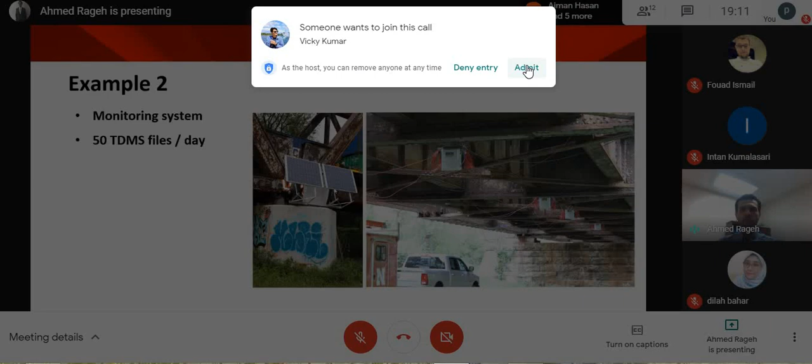And for each train passage, what's going to happen? This computer will start recording the data when the train crosses the bridge. When the train leaves the bridge, it will not record the data. So we call it event recording: collecting the data when we have a train, not collecting the data when we don't have a train. So let's go back to our coding thing.

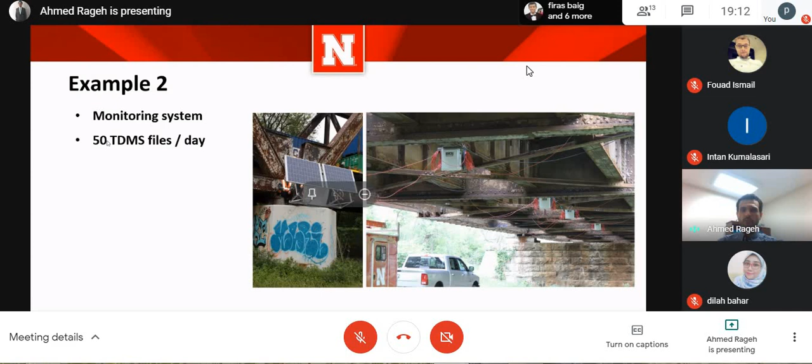So for each day, we have on average about 50 trains that cross that bridge. So this means after almost 2 months, we have almost 3,000 measurement files. Imagine we need to access these data on a daily or weekly basis and compare the results. Imagine we need to open 50 files manually every day and then look into this data. I don't think it's easy, but again, we developed a code that can read all of these data, and then we can compare the results of all of these files at one time. So again, it was not possible with Excel, but it can be easy with coding.

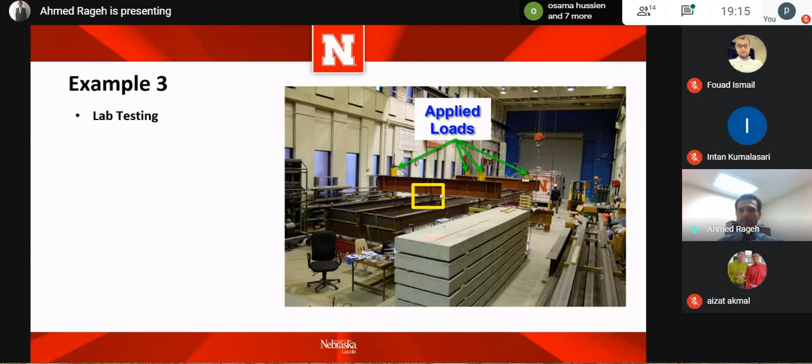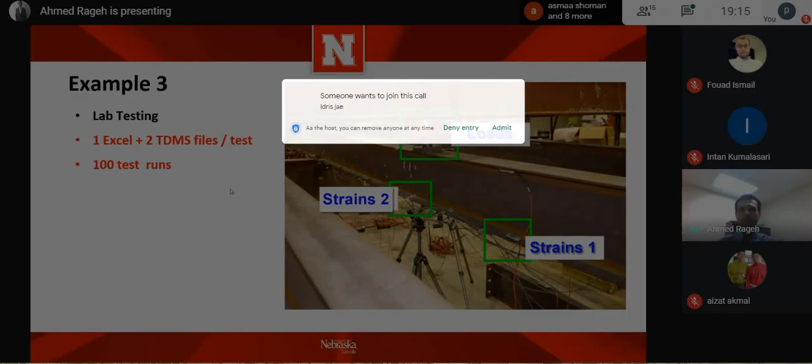And then for this testing, we have 2 different measurement systems. So for each test, we had 3 different recording files. And this test was planned to have about 100 test runs. So we have about 300 files for testing.

And back to the point when I told we have 2 different systems. Why do we have 2 different systems? Because actually here we're using 2 different sensors. We have this one, it's very famous, it's called BDI sensors. These BDI sensors are reusable, so we can use them multiple times, and they are very expensive. So when we install sensors in this system, we make sure that these sensors are very far from the point of failure, because we don't want this sensor to get damaged.

And close to the point of failure, we use another sensor. It's foil sensors that are cheaper, and they can be used only once. And because of that, we have 2 different systems. We have systems that report the recording for BDI sensors, and we have systems reporting the recording for these 2 other sensors, loads and strains.

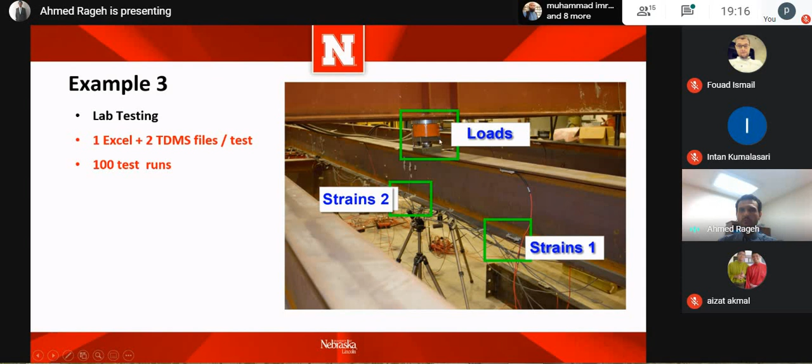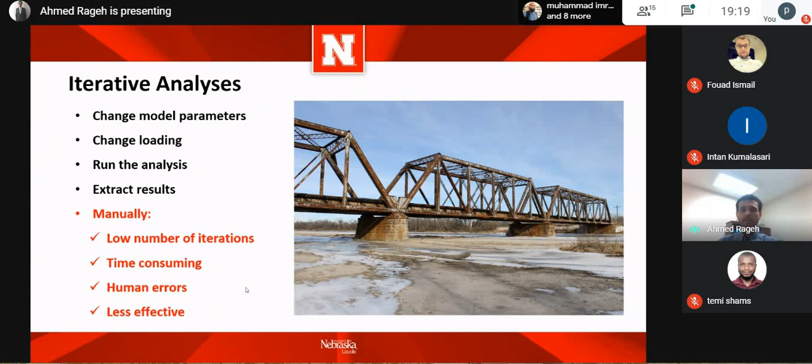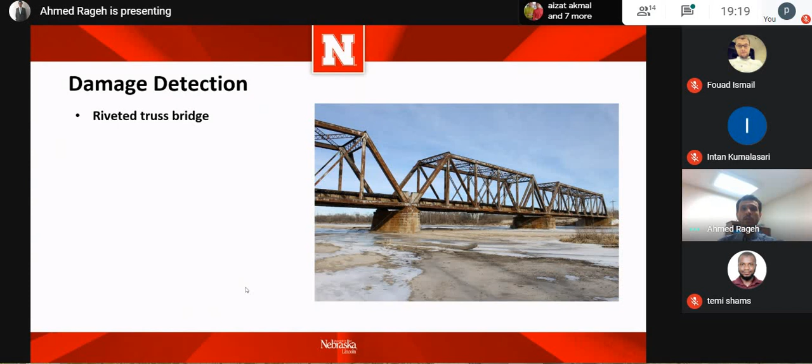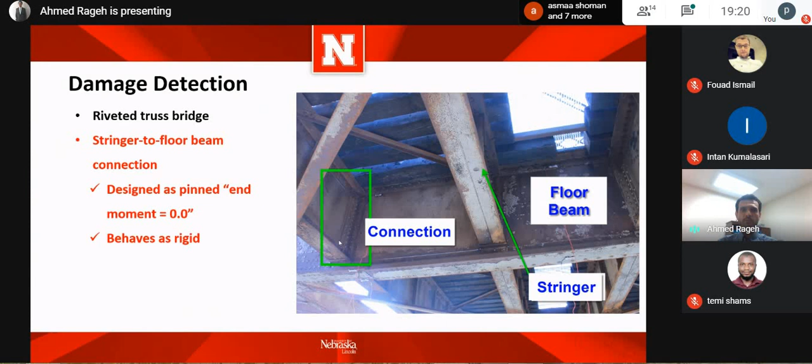So it can be either a vertical crack, and this is caused by fatigue, or it can be broken bolts. Both of them could happen for this connection. And this is a major issue for this type of bridge.

So we want actually to develop a structural health monitoring system that can predict if we have damage or not. And predict means we can apply the monitoring system that we showed earlier, and then we process the data of this monitoring system, and then it can give us an alert: okay, your bridge is good, or your bridge has a problem, or your bridge has damage. So this was the end goal or the objective of this project.

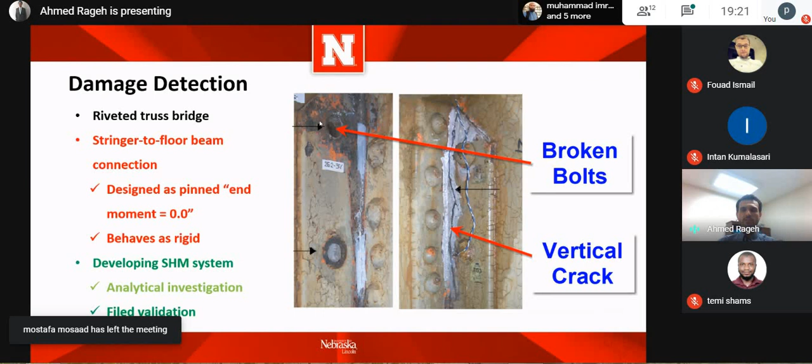So we started this process actually analytically, and this is what we are focusing on today. And then we did some field validation as well. Moving on, when we do iterative analysis, we need to change something in the model, and we need to change the load as well. Let's focus first on the model parameters.

So we wanted to change the model parameters in our SAP model at 20 locations. And each time we have only one damage at one location at a time. Besides the damage location, we also have another parameter, which is damage intensity. Damage intensity means the magnitude of the damage at each location.

For example, in our model, we'll start first assuming all of these connections are healthy. Healthy meaning we don't have any damage. We will run the model, and then we will get the results. This is the first one. Then I will start at connection number 1. I will model a damage intensity of 10%. Then run the model, get the results.

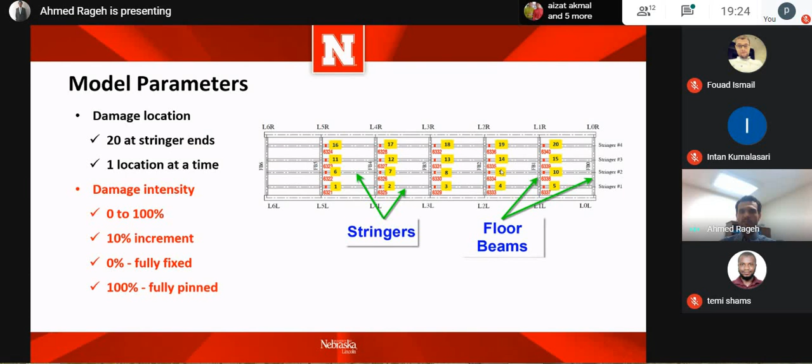Besides the model parameters, we wanted also to change the loads. So we mentioned earlier we have 81 train loading configurations provided. Then we sorted these trains based on the load, and we figured out we have about 24 trains that have the highest load magnitude. And we selected in our study to focus on these high load trains because we assume high load trains will give us close agreement. With that, we highlighted what we want to do in our model, in two things, parameters and loading.

Before we go to the next point, sorry, if we did a simple calculation, we realize that considering the 20 damage locations, 10 different damage intensities and 24 trains, we'll have about 5,000, or 4,800 exactly, analysis runs, which is very difficult to do manually. And moving to the next point, what MATLAB is going to do.

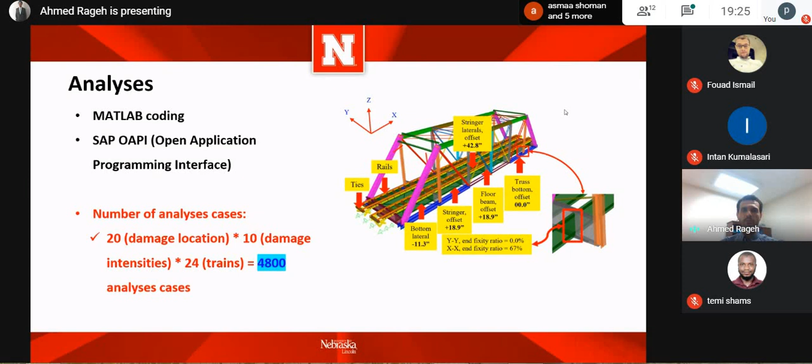The first thing MATLAB is going to do, it will read the Excel file that has the 81 trains, and it would be able to select the 24 trains that we wanted, or it can select whatever trains you would like to select. After that, MATLAB will control SAP2000.

So it will start taking the trains from the Excel file, and then it will model these trains in SAP, and then it will modify the connections, first the location, second the intensity, run the analysis, and extract the results. And at the end, MATLAB will give you a matrix that has the 4,800 analysis results. After getting your results, you can start doing your research. So actually, MATLAB coding or any coding is only a tool that makes getting the results easier.

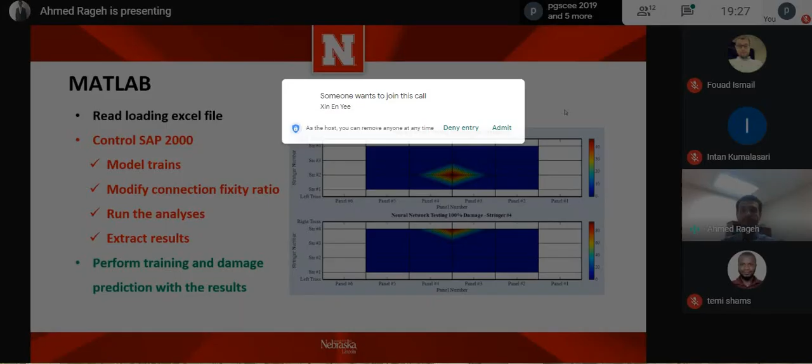It's not the end goal. After getting the results, you can do your research. For us, we use machine learning to be able to predict the damage location and damage intensity. And actually, this one shows a heat map. We call it a heat map. It's a plan view of the bridge shown here.

These thick exterior elements are the truss, and the interior horizontal lines are the stringers. And we have the vertical elements here that show the floor beams. This red point shows that we have damage here, and this other plan view shows that we have damage at another location. But this is only one way; you can select any way for highlighting the damage location or intensity.

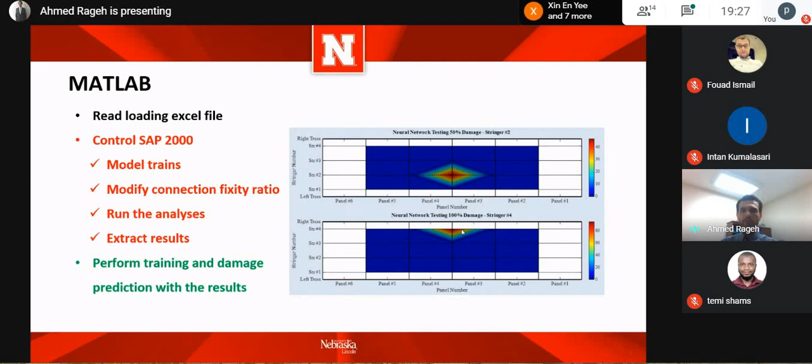With that, we finish the second point in this presentation. And now I will be moving to the last point, which is automated model updating. What we mean by automated model updating, some people call it model calibration.

In an easier way, when we go to the field, we take some measurements, and we usually develop an analytical model of the bridge, or it does not have to be a bridge, it can be a building. And then we would like our model to give us the same results as the measured responses. And here comes the meaning of model calibration or model updating.

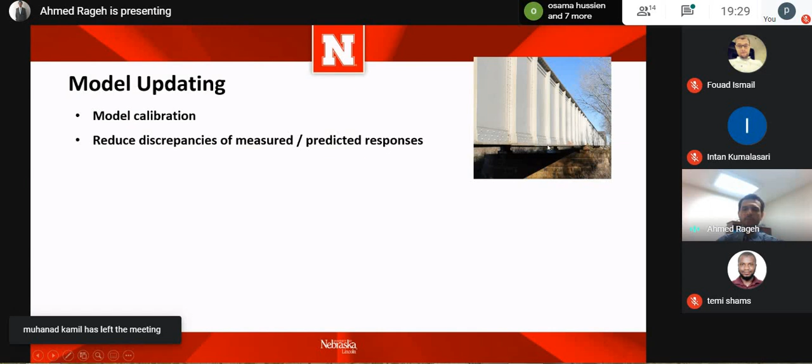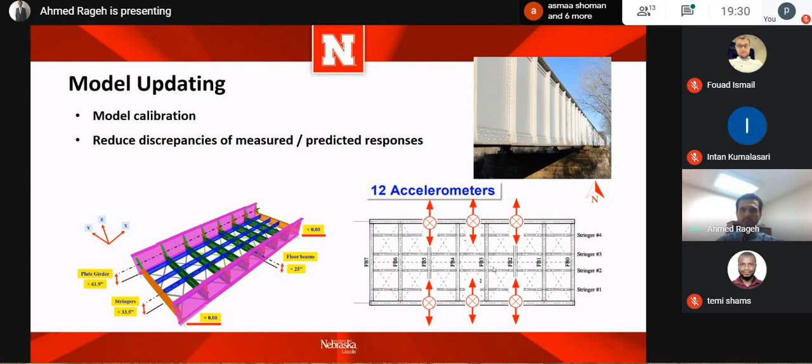This plan view shows the bridge with the accelerometers that we installed. We had 12 accelerometers installed at these marked red points, and we were able to measure acceleration in the horizontal direction and in the vertical direction. Then, initial results. Initial results means what we get from the field and what we get from our initial model, the model without any calibration or updating.

So we took the acceleration measurements from the field, and then we used software called ARTeMIS. It's very famous software; you feed it the measured acceleration, and it gives you the frequencies and mode shapes of the bridge. With that software, the measured responses, and that accelerometer layout, we were able to identify 3 major mode shapes. This is called a stabilization diagram, and here we can see we have 3 frequencies. The first one is 5.17 hertz, the second 9.36, and the third 14.5.

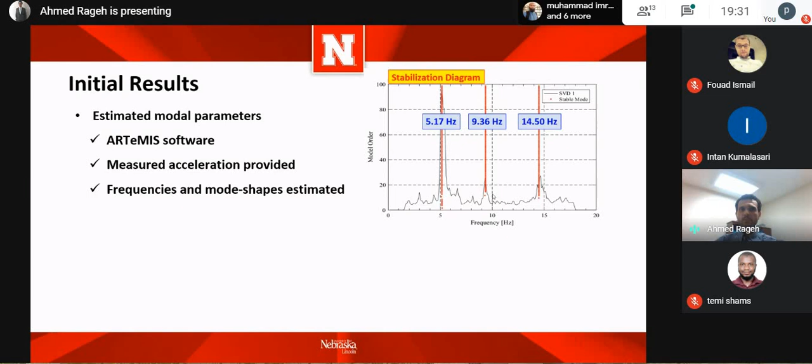If we take a quick look at the comparison between the measured responses and the initial model results, it can be shown in this table. The first column shows the mode number 1, 2, 3, then we have the field, and the next column is the initial model results. The important column is the very last one, highlighted in green, which shows the difference between the initial model and the field.

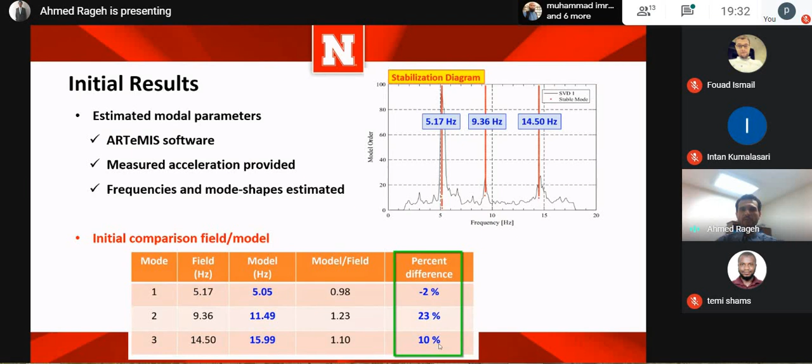We can see for the first mode we have about 2% or minus 2%. The ratio here is very good. We can tell that this model does not need any updating for the first mode. But if we look at mode number 2 and mode number 3, we have a 23% difference, and for number 3 a 10% difference. Based on that, we need to do some model updating or calibration to improve our model so that we have less difference between both.

To do model updating, first we need some requirements. The first requirement is model updating parameters. What's meant by parameters is what we should change in our model. For example, you can change the modulus of elasticity.

You can change the fixity ratio of the connection. You can change the rigidity of the members. You can change the end condition, like instead of using pin roller, you can use springs. And actually, this is usually based on the experience.

So I have seen in some research, people may use 1 or 2 updating parameters in their model. And I have seen some people using 31 parameters. And again, when you increase the number of parameters, you may get better results, but it will need more work.

And the second thing we need to take care of is the objective function. In an easier way, what's the objective function? It's only a function that has the difference between measured responses and the analytical model responses. So it's only like frequency of your model minus the frequency of your field experiment. And when this objective function, or the difference between both, is reduced, you are getting a good model. If it is very high, your model is not good enough.

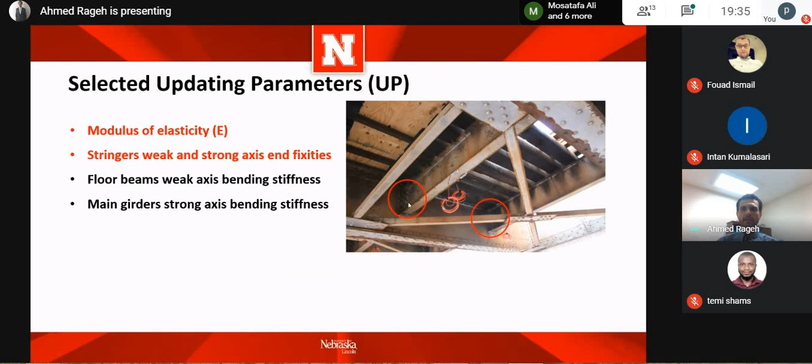And also for the floor beam and the main girder, we change the bending stiffness. This main girder, I think it had about 4 plates. And at some point, these plates may not work together. So if they do not work together, this girder will have less or smaller stiffness than is assumed. So we assumed also that we can change the main girder bending stiffness.

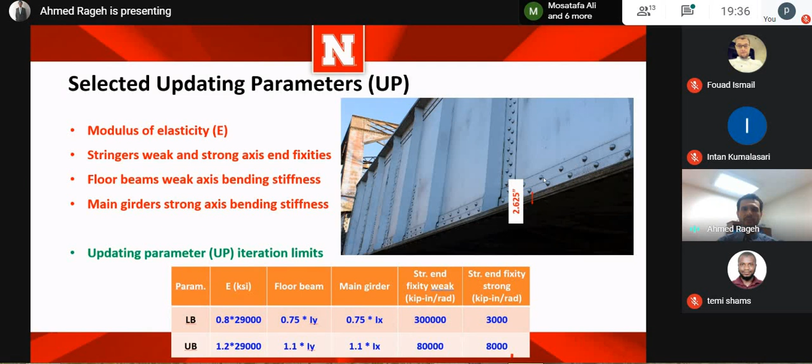Based on these assumptions, we need also to give an indication about the limit, because when the coding starts, it will need a range in which to select your parameter values. So we define here for the updating parameters a lower bound and upper bound. Lower bound means the minimum value that the code will not go below, and the upper bound is the upper value that the code will not go above. These values are very necessary for the iterative approach that the code is going to use.

Then moving to our objective function, we need this objective function to be minimized, meaning close to 0. And this equation shows the objective function we used. Some people call it a residual. Any name is fine. But the most important thing, it is the field experimental frequency minus the frequency of the analysis divided by the experimental frequency. You can change this. It does not have to be this way, but it should be something close to that.

And as we can see, if this value approaches 0, this means the experimental values are very close to the analysis values. And we should consider that each one of these is a vector, so it's not one value, because for the experimental, we have 3 values, 5, 9, and I think the last one is about 14. So it's vector minus vector divided by a vector. It's not one value. And when this residual or objective function approaches 0, this means the field frequencies are almost like the model frequencies.

Then moving to the next important thing: we used a genetic algorithm. This is a very famous algorithm that can do optimization. Optimization meaning it can select the values of the parameters and try to minimize the objective function. So this algorithm will do some iterations until it finds the best values for the updating parameters that we selected, which include the modulus of elasticity and the bending stiffness, until it finds the lowest possible objective function.

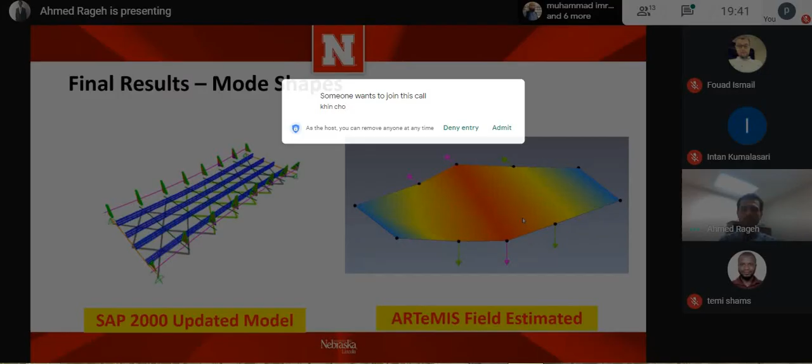Moving to our quick conclusion. I think coding can help in expanding the parametric work, and it's very easy when you code to expand the number of parameters or the number of load cases. When you have a huge parameter set and huge results set, you can get a better conclusion. And with that, it is easier for a researcher to convince the reviewer about his or her work. Because if you have fewer parameters and fewer results, some reviewers will not even read your entire work.

Mainly, a reviewer will look at your abstract and conclusion and maybe the early introduction, and based on that, he or she will decide to go further with your publication or not. And coding can reduce time consumption, and it can also reduce human error. This presentation focused only on coding and research, but coding can also be used in design. I'm not sure if any of you are focused on design, but the same optimization procedures that we do in research are really needed in design.

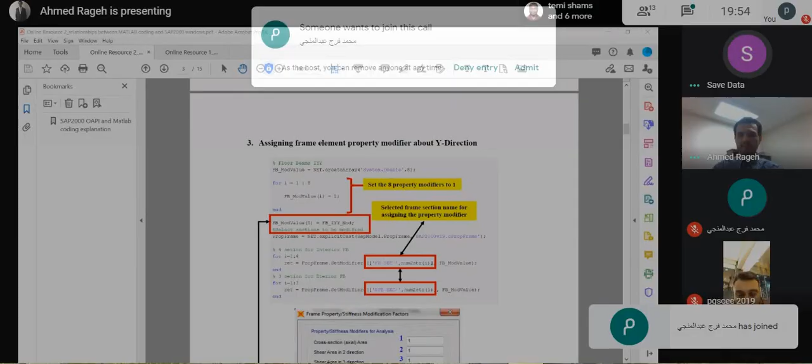Yes, this moves us to the second question. Sure. Is it possible to make a few points through the model to monitor the results? Some points through the model to do what? Monitor, do calibration. I cannot hear your voice very well, if you can raise it up. Okay. Can we put some points at different locations through the model to specify the confidence ratio? Let's say on the right of the model 50%, on the left of the model 55%, in the center of the model 60%, like that.

You can do whatever you want. If you are doing something like this, you can do that for sure. But you should have some reason why you are changing these values. You get my point? If you ask how much the difference should be, 20% or 5%, I don't think there is a firm answer for that, especially when you are dealing with measured responses. It's very difficult actually to get everything to match.